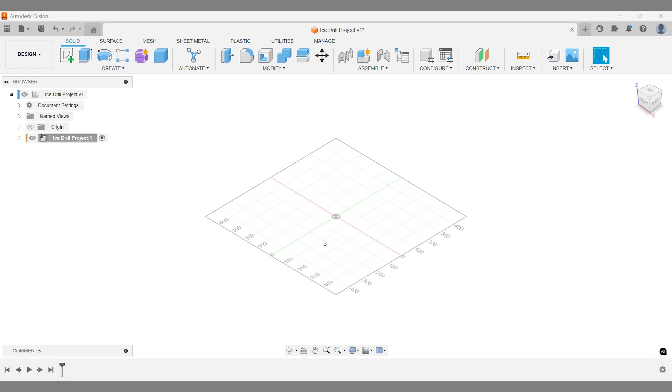In this tutorial, we'll prioritize speed as we create a concept for an ice drill. Instead of focusing on fully constraining sketches, selecting materials, or refining joints and components, we'll streamline the process for fast concept development. While these details are essential for production-ready designs, they aren't our focus today.

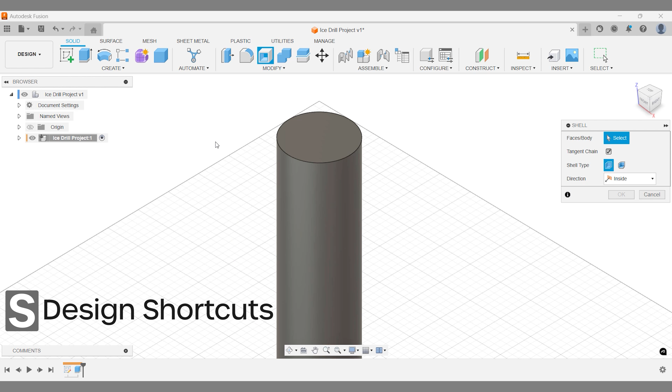We'll start by building the core structure of the drill's middle section. Follow along as we dive into the next step.

When designing a helix, you have a lot of creative freedom. While there are plugins available, in this tutorial we'll focus on manually modeling the helix. The sketch lines you create form the foundation of your helix.

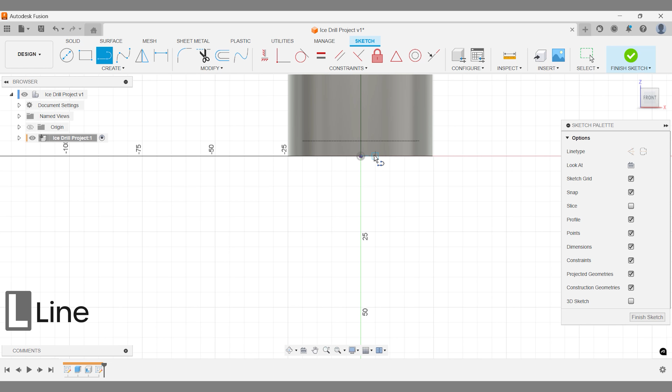And as with all parametric modeling in Autodesk Fusion, you can easily adjust the sketch later and your 3D model will update automatically. So don't stress about getting it perfect on the first try. Refinements can always be made as you go.

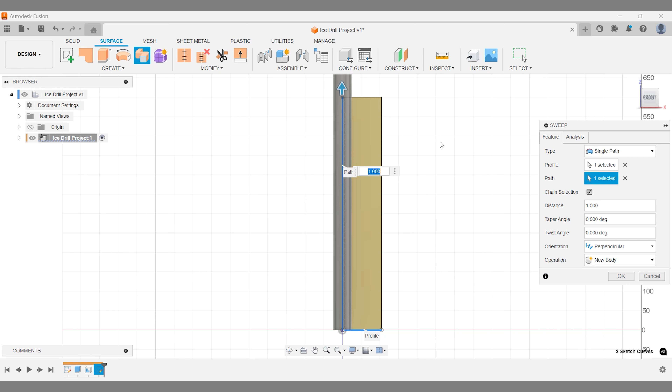Don't be intimidated by the Surface Modeling tab. Once you start combining solid modeling, surface modeling, and form modeling, you unlock a lot of creative potential.

The distance parameter is key because it lets you control how much of the profile you want to use. And the twist angle is a powerful tool to shape your design. You can even enter formulas in these fields for more precise control.

Don't worry about the thin design at this stage. We'll address that later on.

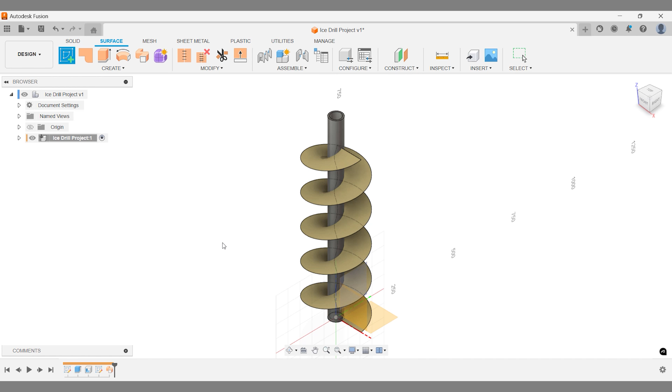This is the section where the ice drill will be held. I'm going to make the first design iteration a bit unconventional, so we can see how easy it is to go back and make changes, and also explore some minor obstacles that might come up along the way.

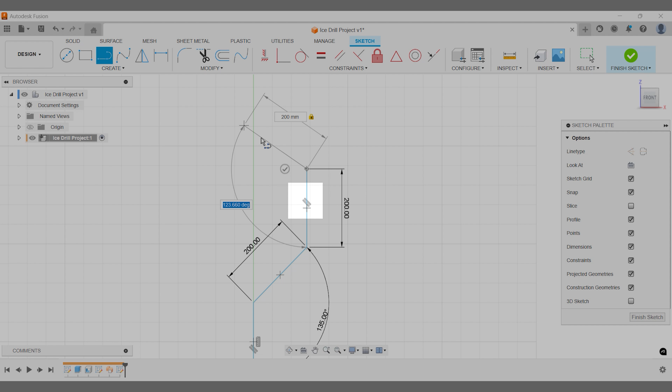You can quickly move between input boxes using the tab key, and Fusion assists your design by automatically applying constraints. Most of the time, these constraints are helpful, but keep in mind Fusion can't read your mind. If any constraints don't fit your needs, simply delete them.

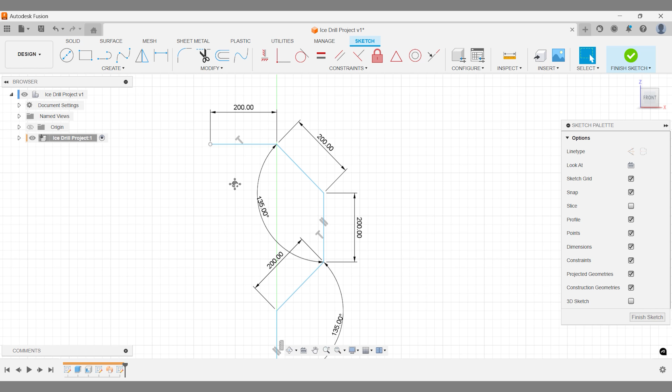Our sketch can be easily modified using the Fusion timeline, but if you're having trouble adjusting dimensions or moving lines, it's likely due to constraints. These are rules that define how the sketch geometry behaves.

Fortunately, in Fusion, you can always tweak or remove constraints when they're not working for you. By combining constraint edits, adding new lines, and refining existing geometry with tools like fillet and trim, you can quickly make progress.

And mastering keyboard shortcuts will speed things up, making 3D modeling in Fusion fast and efficient.

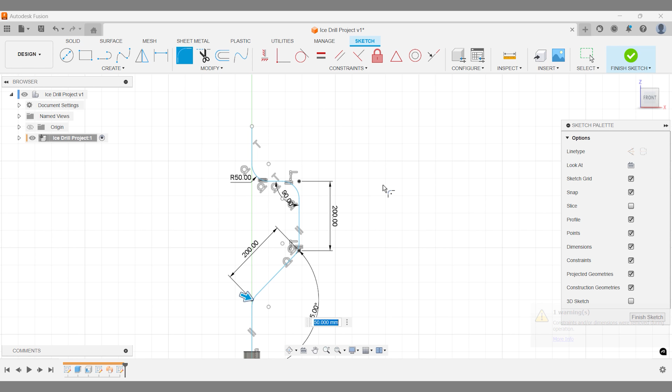In Autodesk Fusion, offset planes are a fantastic tool when you need to create a new sketch surface. For this concept ice drill, we'll place the sketch surface with a quick estimate without focusing on precise technical requirements.

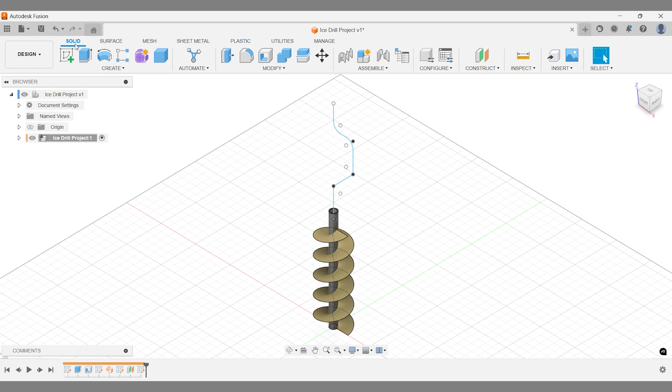In a real-world design, you'd account for pressure in this area when operating the ice drill and develop a more detailed solution for fitting the parts together.

You'll notice familiar sweep details in this step. For now, using the full distance without adding a twist angle will work well for this new body operation. Autodesk Fusion makes it easy to iterate and refine these kinds of designs as needed later on.

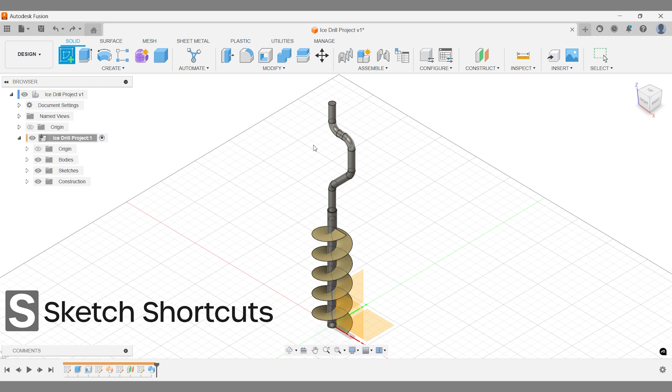Let's explore how to create a fun grip using the revolve command in Autodesk Fusion. This is a great chance to refine your design if you're happy with the initial concept.

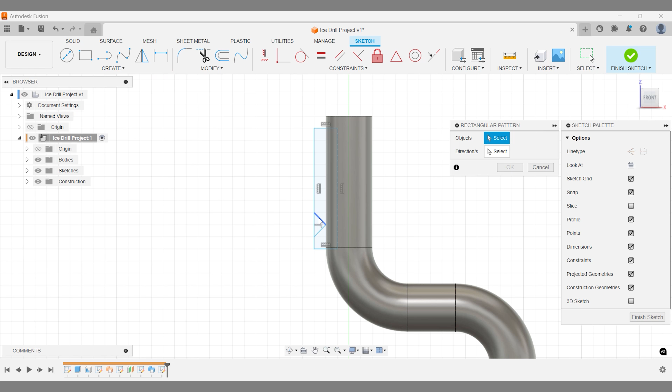When working on a project, it's useful to think beyond individual commands and start combining them into workflows. For example, what happens when you start with a sketch, apply a rectangular pattern, and then add revolve, fillet, and copy rotate commands? The design process becomes much clearer when you think several steps ahead and plan how these tools can work together.

While our first draft of the grip may not be perfect, it's a good starting point. Autodesk Fusion allows you to easily revisit and improve your design over time.

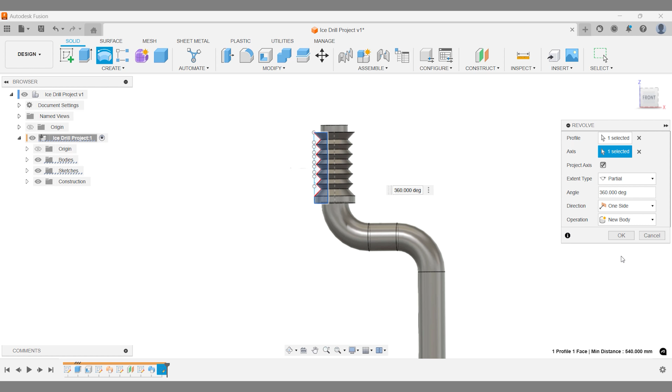By learning how to combine tools effectively, students can speed up the process and get creative with their design solutions, making their workflow more efficient and innovative. This approach is especially valuable in any Autodesk Fusion project for students, as it builds strong foundational skills for 3D modeling.

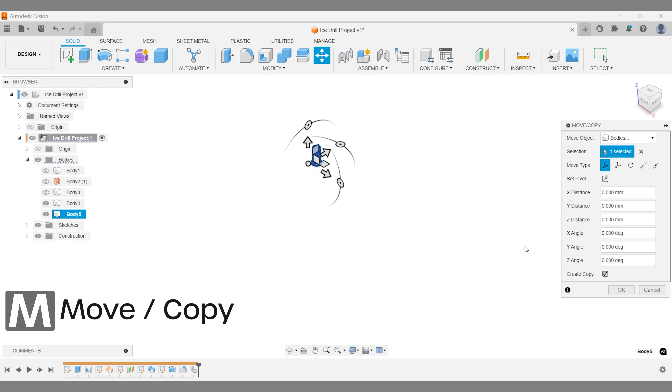Fusion offers several flexible options for copying and moving solid bodies. Be sure to validate your pivot point and check the Create Copy checkbox before finalizing your copy workflow.

This method is quick and efficient for now, but what would you prioritize as the next step? Personally, even though speed is important, I see an issue with having two separate bodies, so I'd prefer to combine them. This way, we can improve the overall quality without sacrificing time.

We're going to combine body 4 and body 5 to create a new component. Be sure to select the correct operation type so you don't accidentally cut away one of the bodies. Once combined, the new component will instantly appear in your project browser, ready for further adjustments.

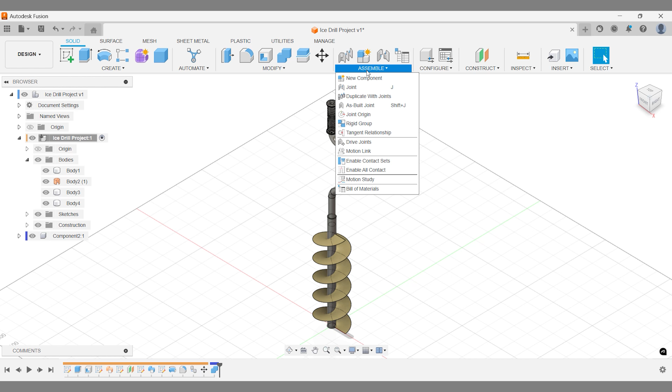A well-structured assembly isn't the focus for this fast-paced draft, but I'll use the joint command to position a copy of our grip further down the ice drill.

The copied component appears in the project browser with a clear logical name, making it easy to snap the joint into different positions. For now, the steel part of the ice drill intersects with the grip, but we'll leave it as is. There are still many questions to consider.

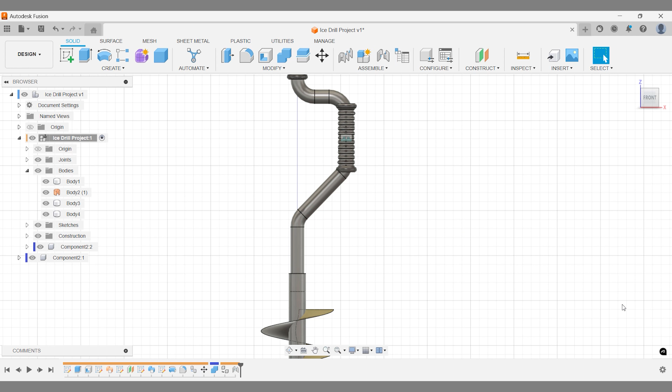Do we want grips this size? Is this the right shape? And should the helix look like this? We'll need to answer these before diving into the finer details.

We'll use the thicken command to give the helix more depth. While I'm not entirely sure what the optimal design for the bottom part of the helix should be, it's a great opportunity to experiment.

Try using the chamfer tool to explore different design options and see what works best.

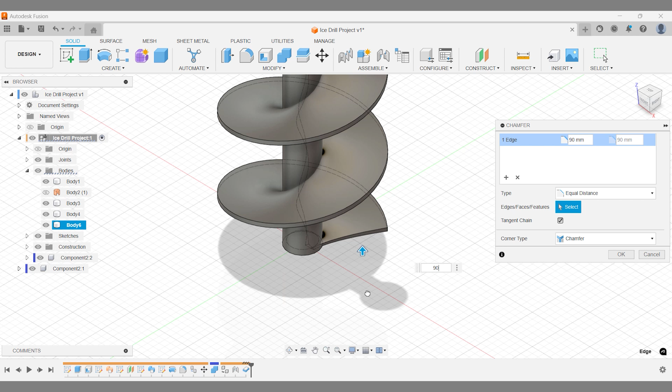If you need to quickly switch between different stages of your design, remember that Ctrl+Z is your go-to for undoing actions, and Ctrl+Y allows you to redo them. This will help you toggle between changes quickly and efficiently as you refine your design.

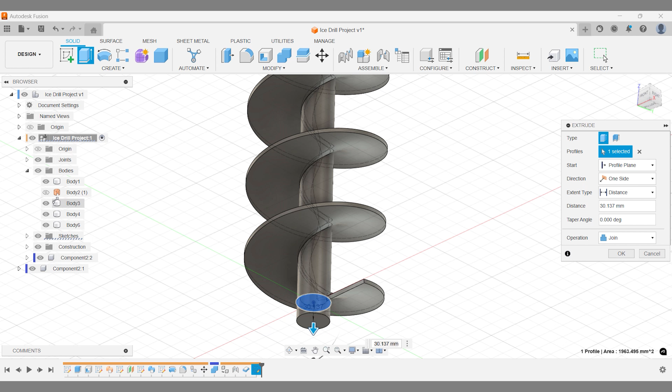A sharp end will make it easier for the ice drill to penetrate the ice. You can achieve this by creating a simple sketch and combining it with an extruded circle with a taper angle to form a cone. Once joined with the other parts, it becomes one solid piece.

It's helpful to toggle off the visibility of other objects to ensure you have a clear view of what your join operation is connecting. Our helix is starting to take shape, but there are still a few important workflows we need to cover to complete the design.

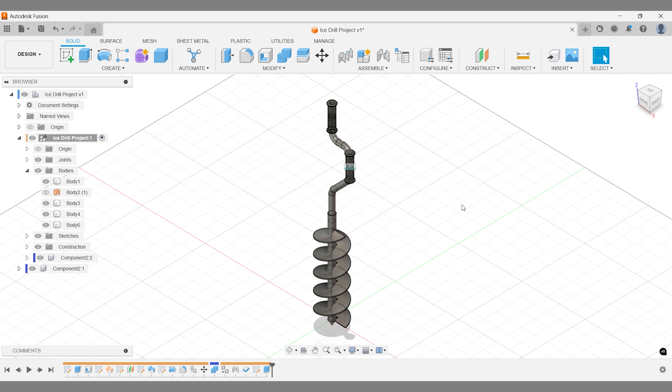Looks matter, and enhancing appearances can be fun. Did you know you can choose whether to apply appearances to entire bodies, components, or just specific faces? This flexibility helps you customize the visual style of your design.

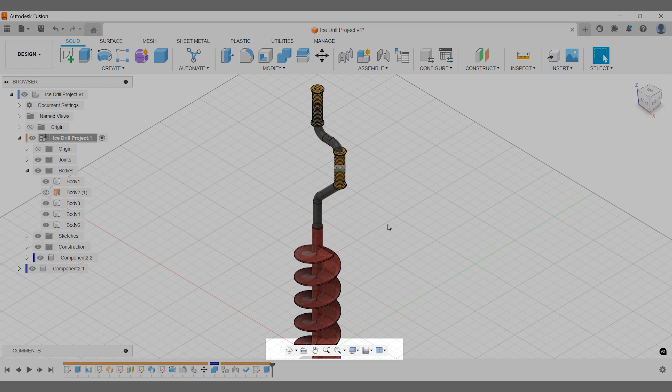Another way to improve the appearance is by adjusting the visual style, which can make your design stand out. As you refine the look, you might notice something off with the top grip. Can you spot the issue? Take a moment to think about it before we go ahead and fix it.

The issue with the handlebar grip is straightforward. I accidentally saved the body when we created the component. No problem though. We'll toggle the visibility before entering the rendering environment.

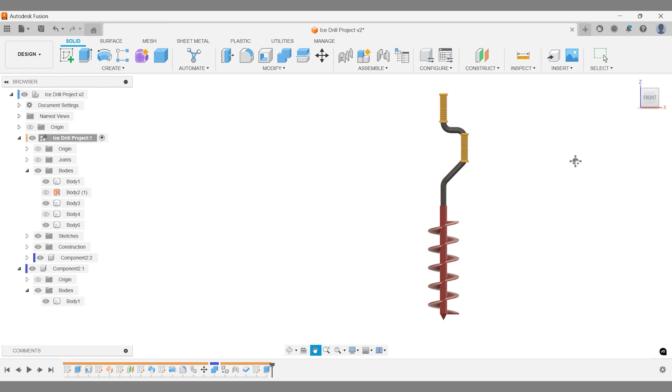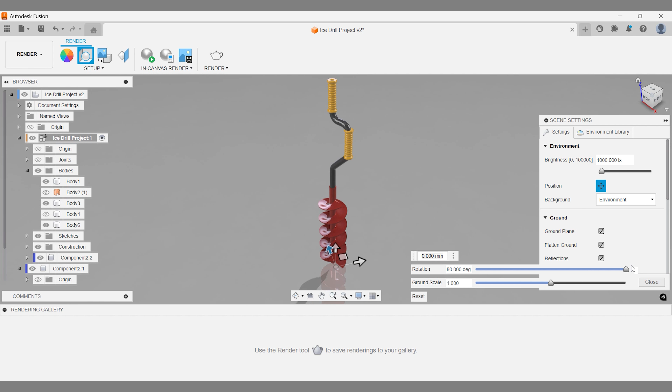A little knowledge of the rendering environment can go a long way. It's easy to combine different environments with the right settings, and it's quite enjoyable to watch how the shadows and lighting come together. It's tempting to overdo it because it's so fun, but my advice is to start rendering early.

Once you have your initial rendering, you can iterate on it, making tweaks until you achieve the perfect result.